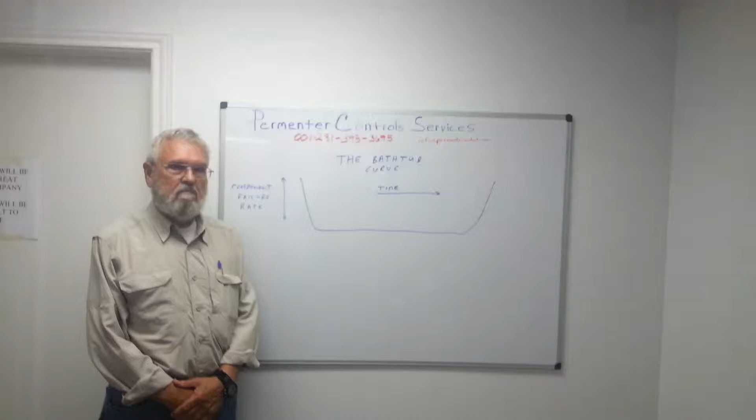My name is Doyle Permenter. Our company is Permenter Controls Services out of Katy, Texas. We do service work and training on motor drives, DC and AC, and engine generator controls, primarily in the drilling business and on ships worldwide.

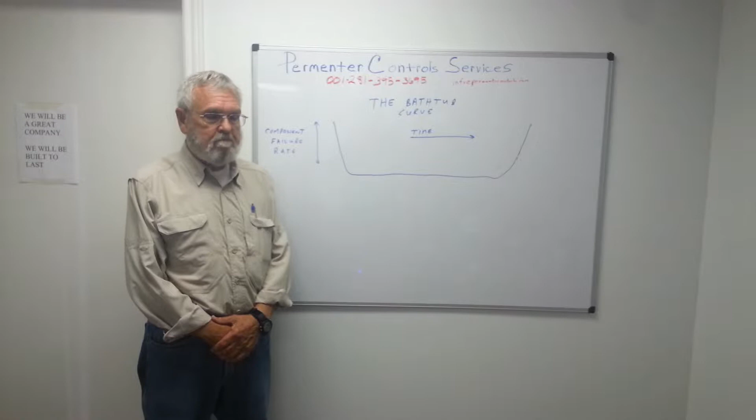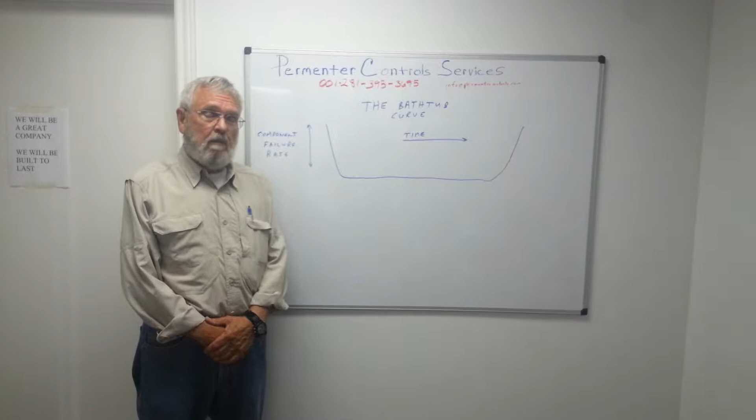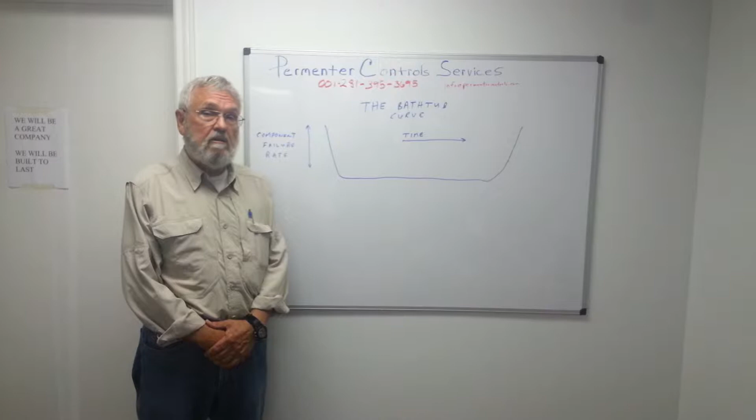We wanted to talk to you for a minute about the bathtub curve. If you're not familiar with it, it's something you need to learn because it demonstrates the lifespan of your system. It's important to us because it shows us where we can intervene in your system to flatten out the bathtub curve and extend the service life of your system.

The bathtub curve consists of 3 sections. It's the graph of time versus component failure rate. The first section incorporates manufacturing, installation, and startup.

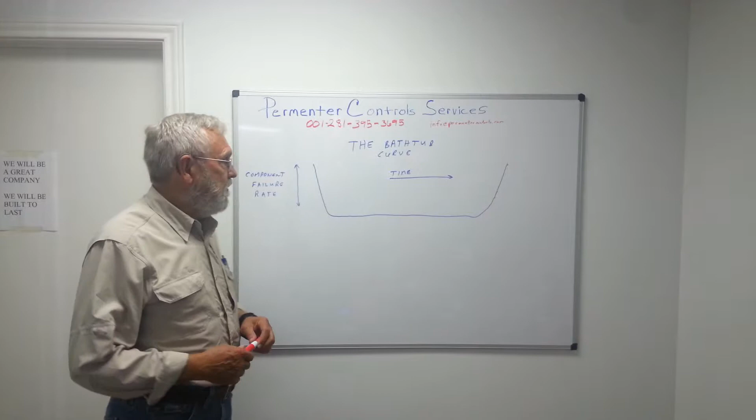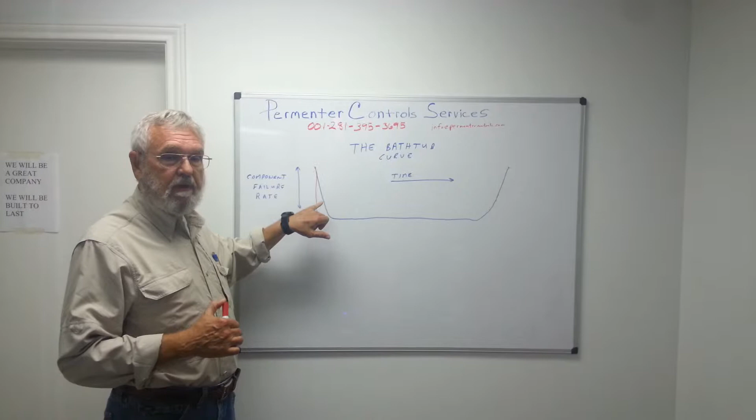We can help you make this part of the curve a little bit steeper. Obviously, we want it to be very steep to reflect few failures over a short period of time.

Not everything works right out of the box. Sometimes you have component failures with new components. Sometimes components are installed incorrectly. Sometimes components are miswired or misapplied in the system.

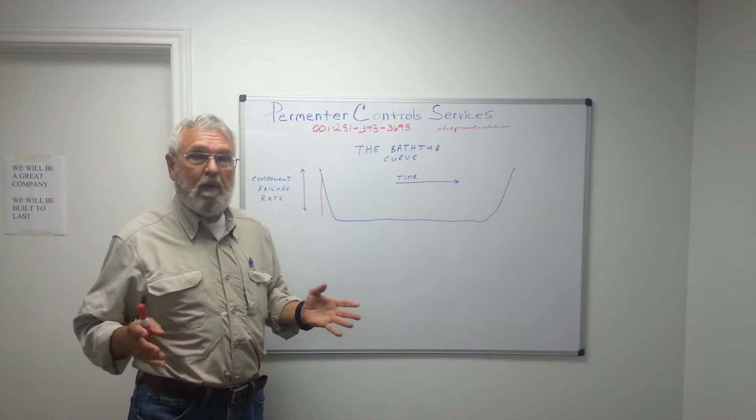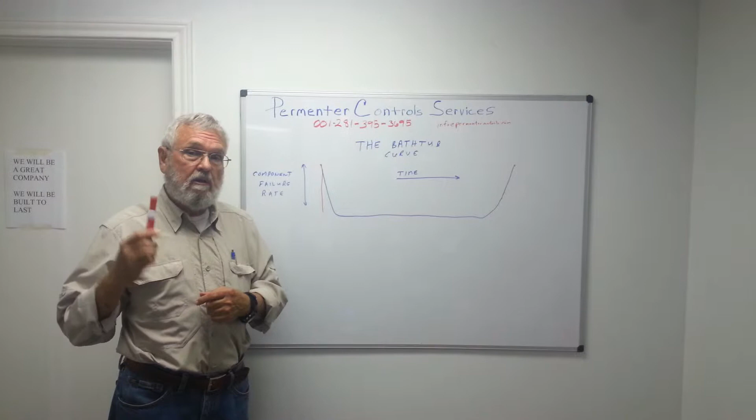Where we can help you right here at this point in the curve is we can vet your drawings. We can make sure that your maintenance people have the right drawings on hand, the right manuals, the right resources to help them work on the equipment.

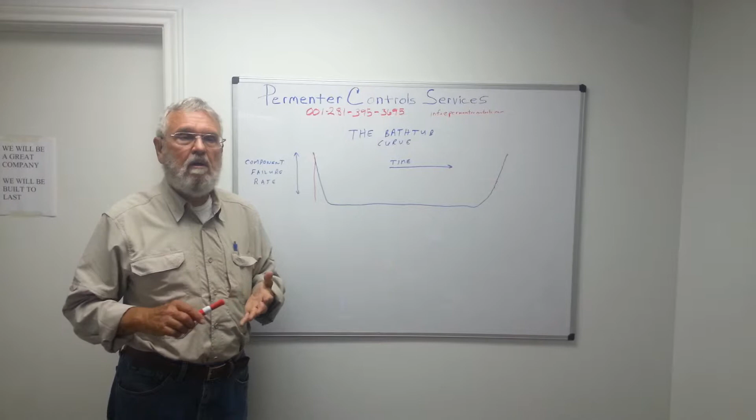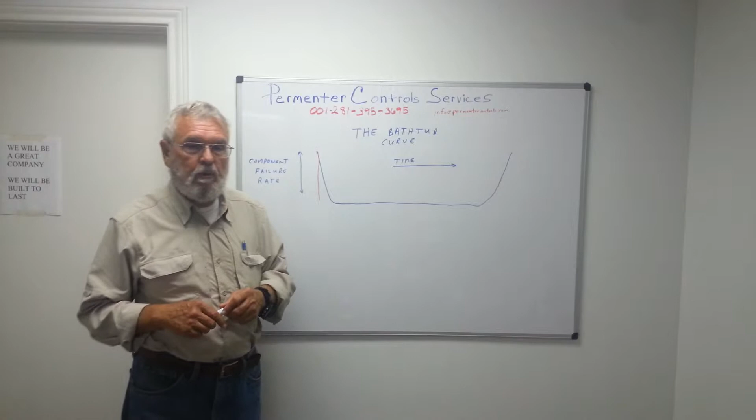We can make sure that you've got the right spares, hardware, software, firmware, and sufficient spare laptops on hand that incorporate the right operating system for you to be able to interface with your controls. We can help you do factory acceptance tests on your equipment.

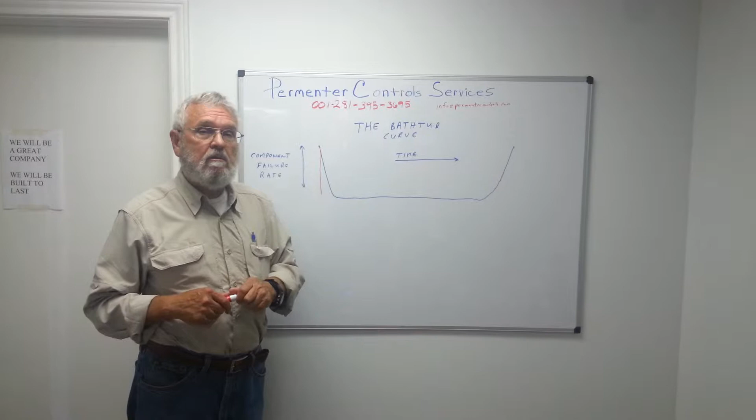For offshore installations, we can make sure that the cabinets get installed correctly. Chances are, by the time your manufacturer's rep shows up, it's almost ready to turn on. The system is already bolted or welded to the deck.

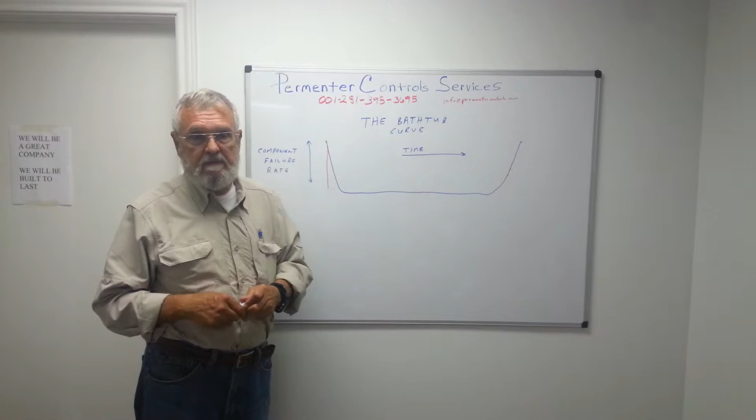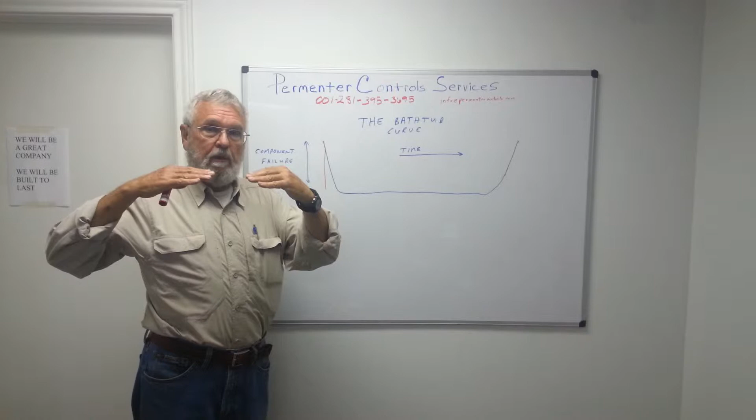We want to get there before the cabinets are welded down because we want to make sure that the main bus bars are lined up correctly, so that when the bus bar splices are bolted in, the bus bars don't have a lot of mechanical stress on them to make them line up.

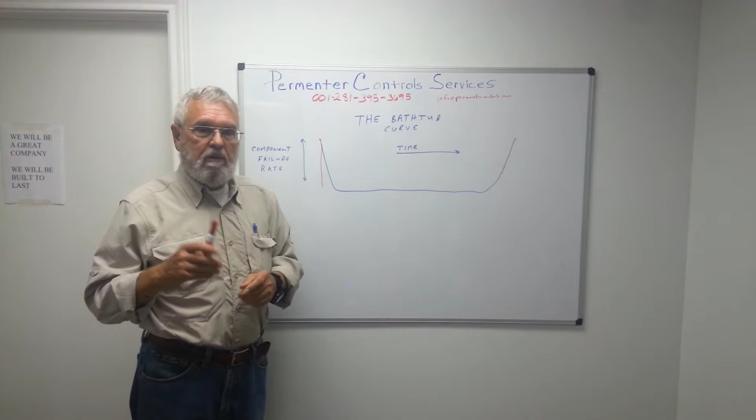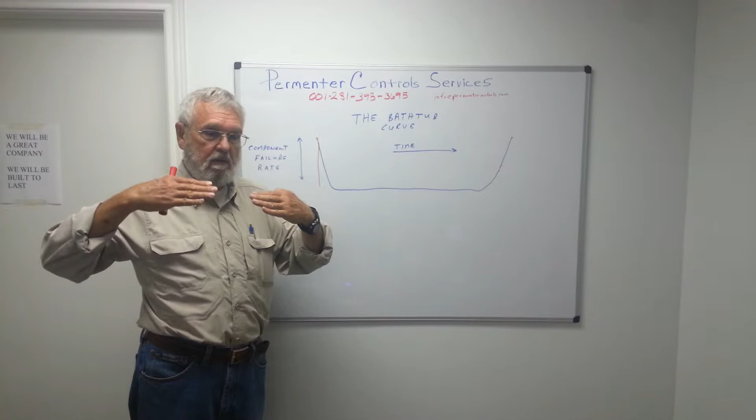What we would do is make sure that the bus bar splice plates are installed loosely without the bolts being torqued up, so make sure all the cabinets are lined up, make sure that the main bus bars are lined up. Then we would go back, verify that the cabinets are plumb, square, and true.

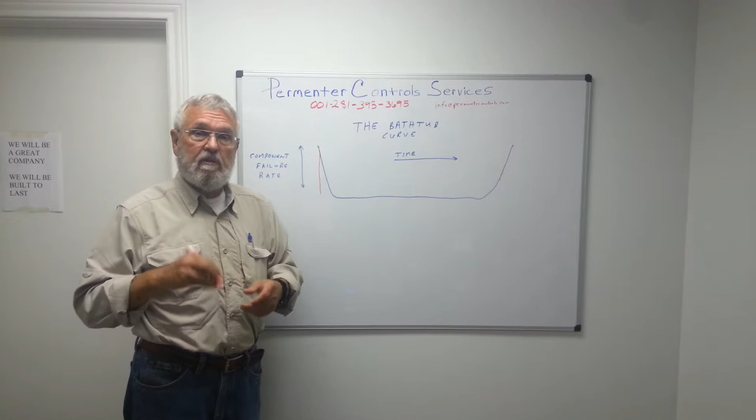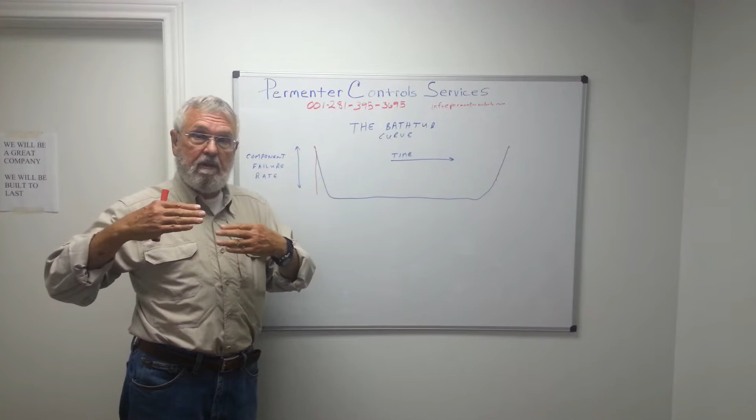Then we would allow the shipyard to weld the cabinets to the deck or bolt them to the deck as required. We would go back then and torque the bus bar splice plate bolts to the right torque. Then we're sure that the main bus bars are not under a lot of mechanical stress to stay lined up.

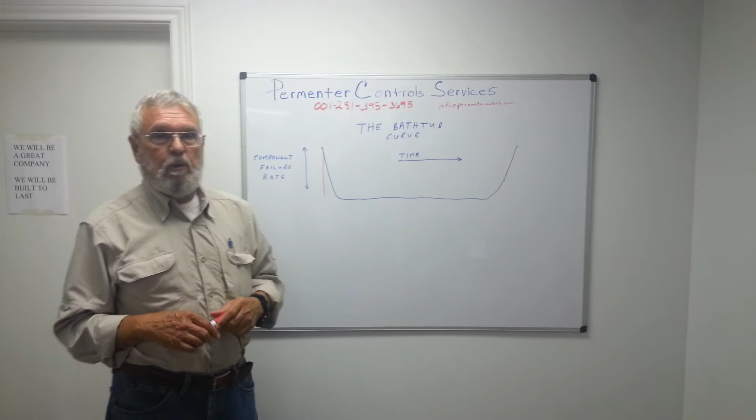The second part of the curve has to do with operation after startup. For years and years and years, this should be a relatively flat part of the curve. There will be failures, of course, but on the long-term average, it should be fairly flat.

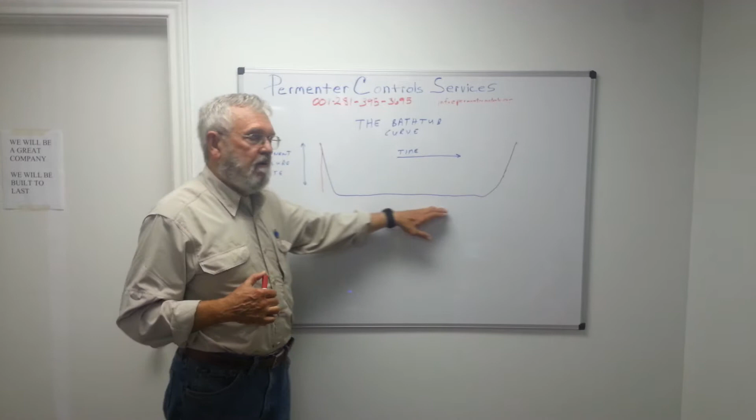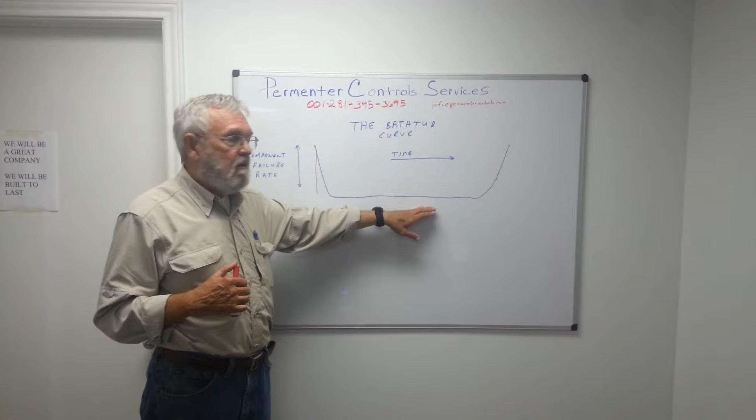Where we can help you at this stage of the bathtub curve is we can run service calls to keep your system running. We can help you do preventive maintenance. And we can do training on your personnel to make sure that they know how to maintain the system.

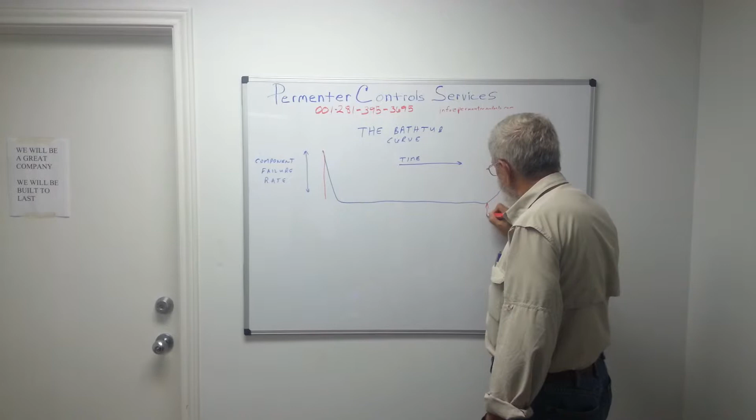All this information I'm giving you is not theoretical. It has to do with our personal experience. At about 10 years,

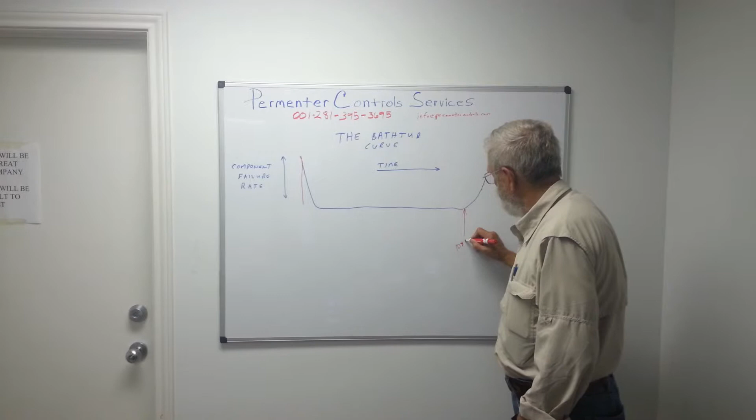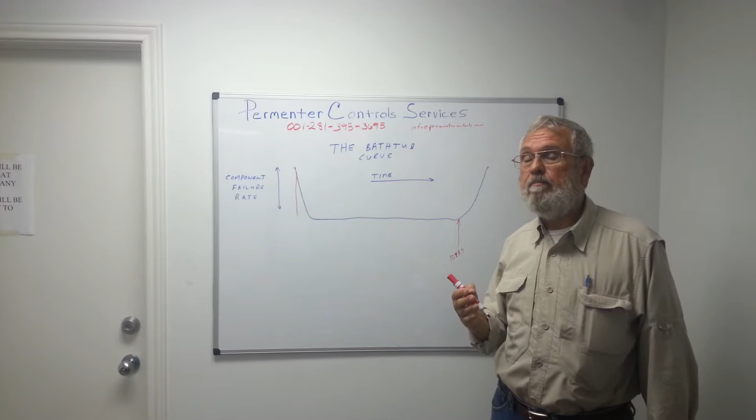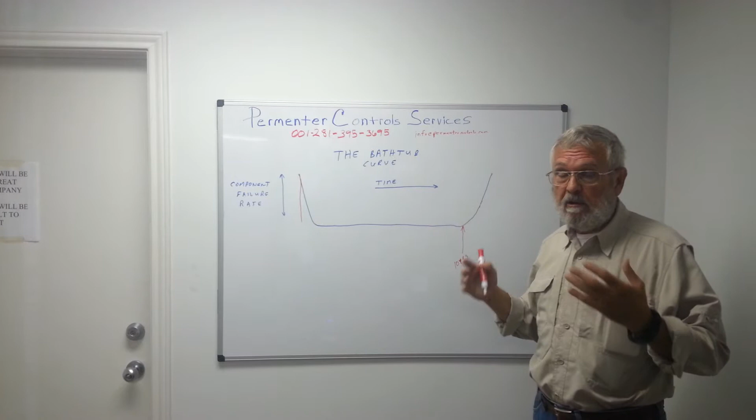we need to go in and recalibrate the electronics, replace the parts that we think are probably prone to failure very soon within this 10-year period. And if you have an SCR system, we can break down the SCR bridges, get them cleaned up, replace the pitted SCR pucks, and redress the SCR puck heat sinks so that they're nice and clean and shiny again.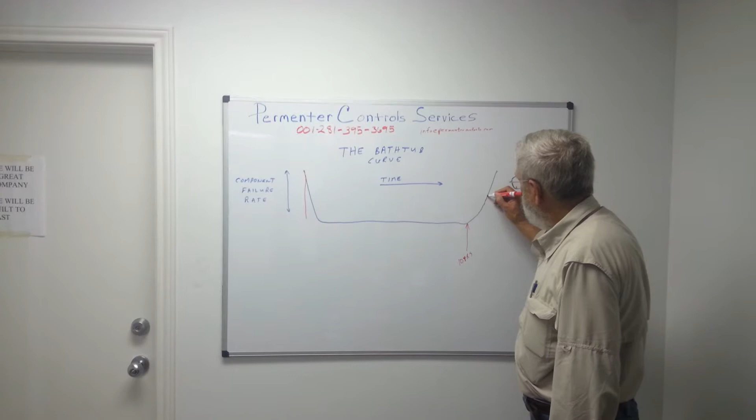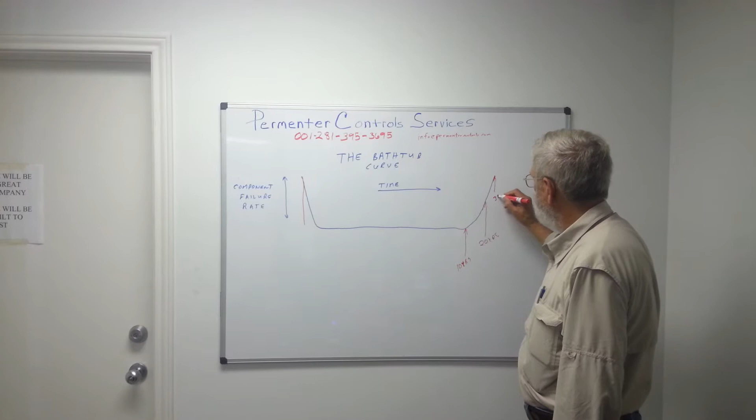At about 20 years, we would do the same thing that we did at 10 years. At 30 years, you have a decision to make. You can get rid of your installation. You can replace the control system completely, or you can give it a major upgrade.

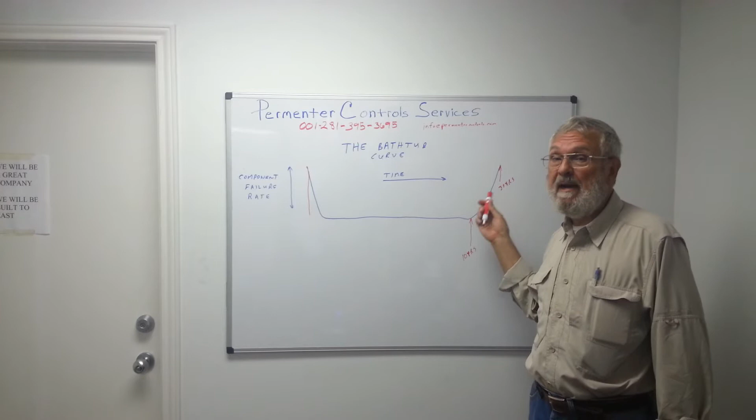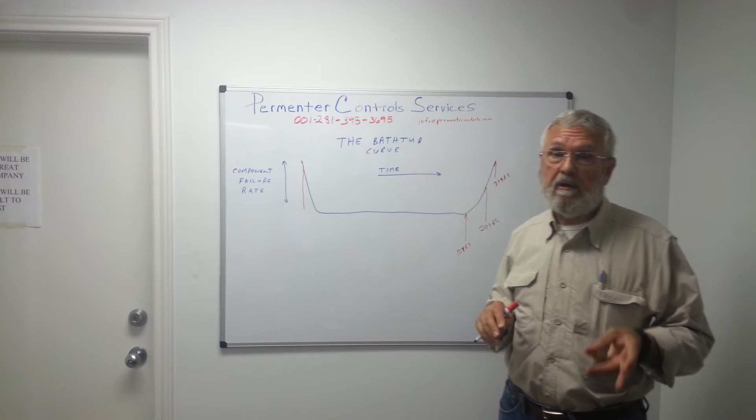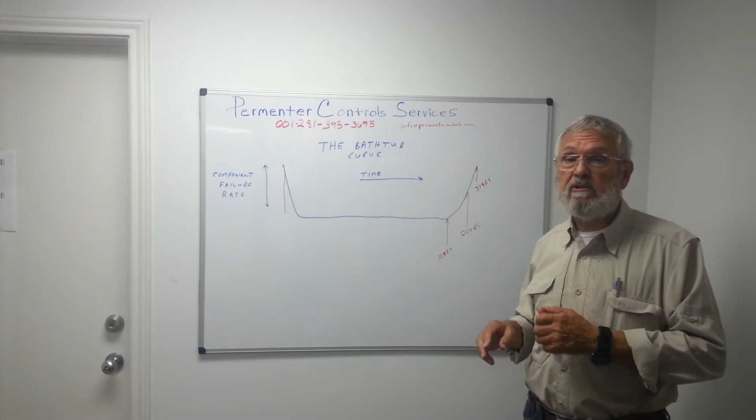At this point, you need to do something. In 30 years, at the very least, do a major overhaul in your control system, replace the electronics. You can probably keep the original cabinets, you can probably maintain a lot of the original wiring. This is put in new controllers, and here again, we would redress the SCR bridges the same reason we did in 10 years and 20 years.

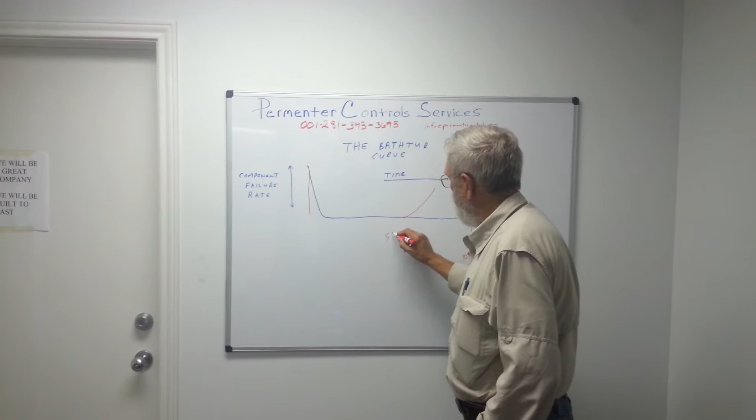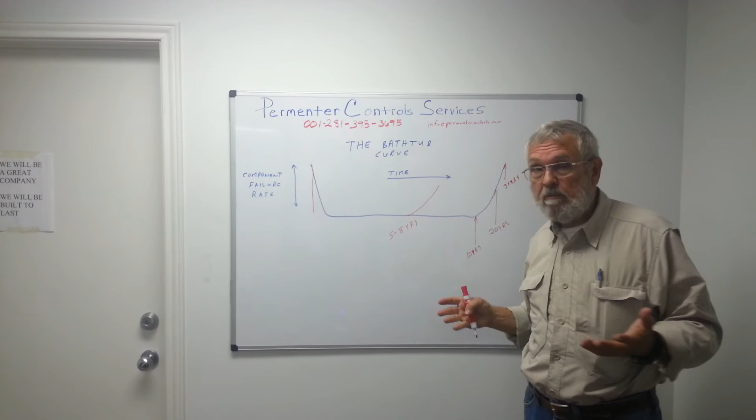Let's back up just a little bit and talk about what I call the shadow failure rate, which applies to digital systems as opposed to analog systems. Now, most new systems are digital, microprocessor based, so this applies to them.

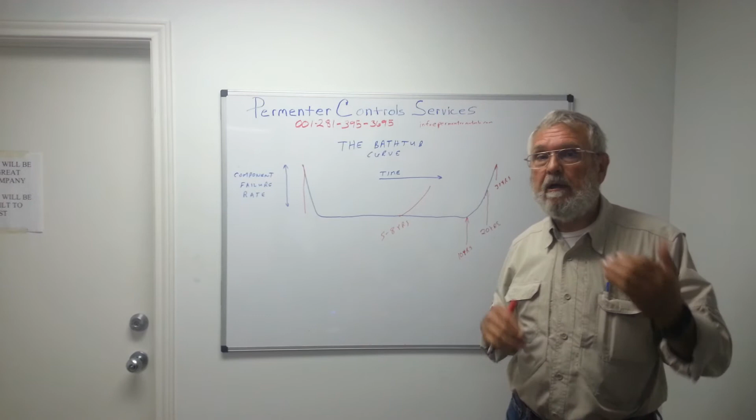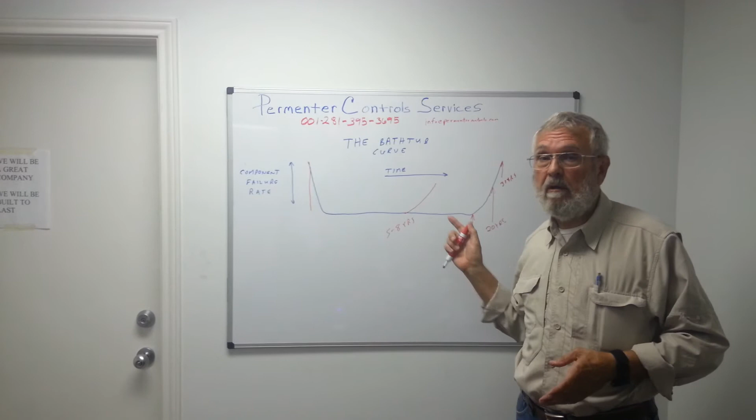This 5 to 8 year curve is not really a component failure rate. What it is, is lack of support. You outrun support at this time. You know how quickly computer-based electronics tends to become obsolete. So your system, after 5 to 8 years, you may not have support again. It's obsolete. This goes back to the initial part of the curve.

You need to stock up on a lot of spare parts to get you through this 5 to 8 year period if you want to continue on and not replace it at this point.

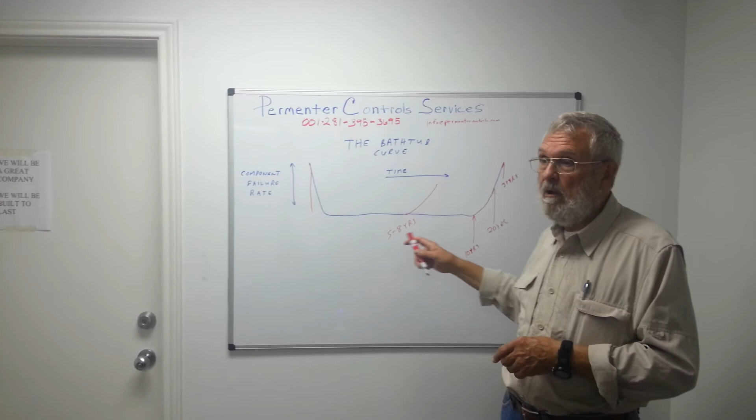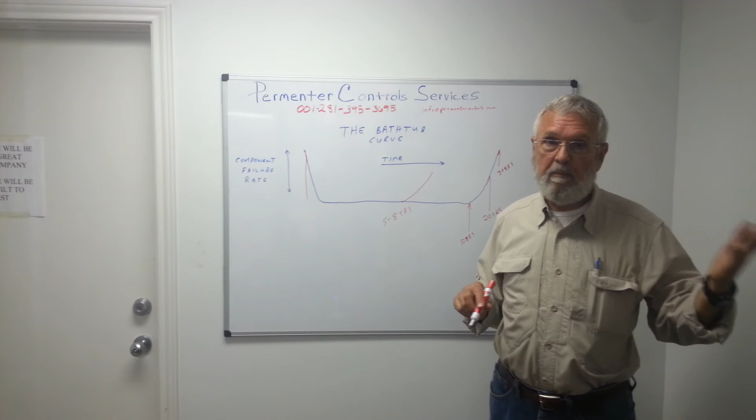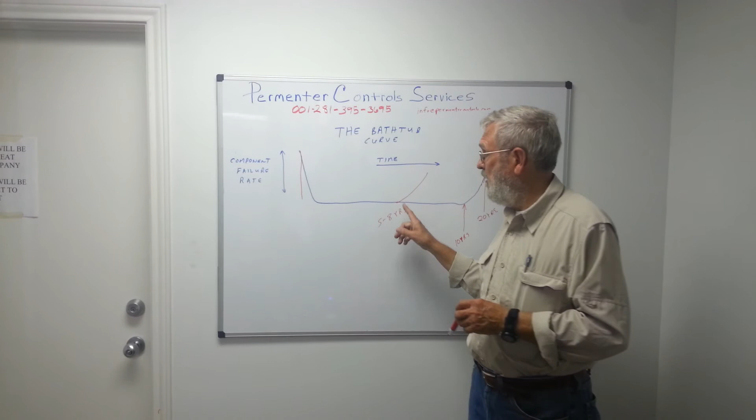Another thing we can do for you at this point is maybe help you track down the original designers of the equipment. Chances are they moved on, or maybe at a different company, maybe they're doing some other different project and forgot about this particular application. We're pretty good at tracking those people down and getting them in touch with you so they can extend your support.